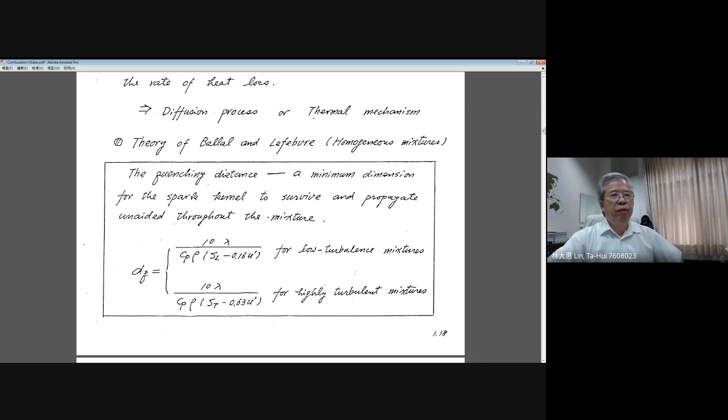Now I try to give you some experimental results to emphasize the dependence on thermal diffusibility and turbulent intensity on the quenching distance for low turbulent mixtures and highly turbulent mixtures. Those data came from the experimental results from Chin's experiments in 1982.

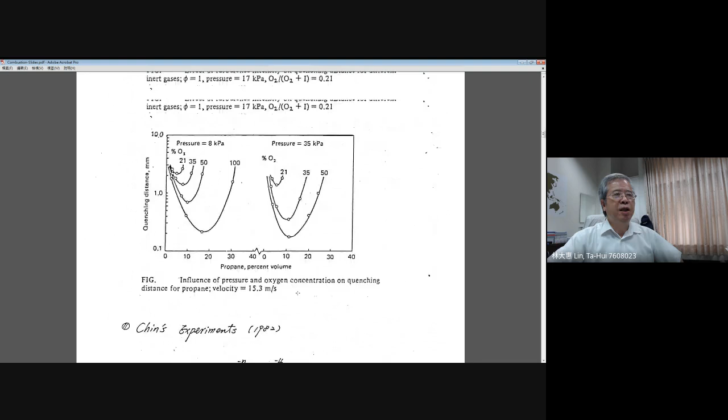The first figure tells you the quenching distance is a function of turbulent intensity shown on the horizontal axis, and it also changes with different mixing of inerts. Let me explain a little bit. For example, here they give you two sets of experiments, one for methane fuel, and the other for propane fuel on the right-hand side.

We look at this because we think about the usual way methane or propane mixes with air. Inside the air, nitrogen will be the inert. When you do the experiment with methane mixing with air, you can see the quenching distance increases with increasing turbulent intensity for both cases of methane and propane.

It is quite easy to understand following the previous formula. When you have a larger turbulent intensity, those turbulent eddies will carry a certain amount of thermal energy away from the control body you want to ignite. If you have a larger turbulent intensity, the quenching distance increases, meaning you need a larger fireball to have a successful ignition.

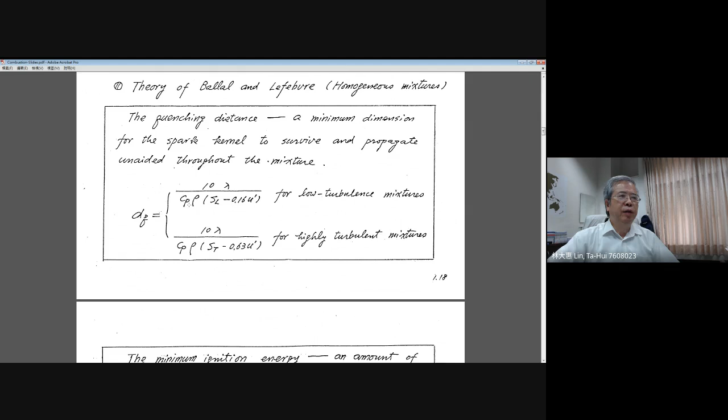Next, we change the inert from nitrogen to carbon dioxide. Nitrogen and carbon dioxide have almost the same thermal conductivity, but carbon dioxide has a smaller specific heat, while nitrogen has a larger specific heat. Going back to the formula, specific heat exists in the denominator. When you have a small value like carbon dioxide, the quenching distance will increase, become larger. So the line for carbon dioxide as inert is higher than the line for nitrogen, for both cases.

This is the first part I want to emphasize. From the comparison of carbon dioxide and nitrogen, they have the same thermal conductivity, but nitrogen has a larger specific heat, which makes the thermal diffusibility smaller. Then the quenching distance will be smaller compared with that for carbon dioxide as an inert.

Now, next we think about when we change the inert to helium and argon, they show different variation for thermal diffusibility. Let's compare these two cases, helium and argon. Both are simple atomic gases, and they have almost the same specific heat, but the thermal conductivity for helium, because it has a smaller molecular weight, is stronger, larger than the thermal conductivity of argon, which means they have a higher thermal diffusibility.

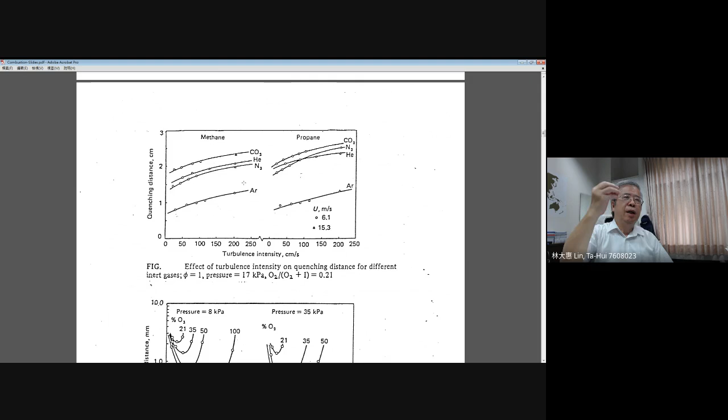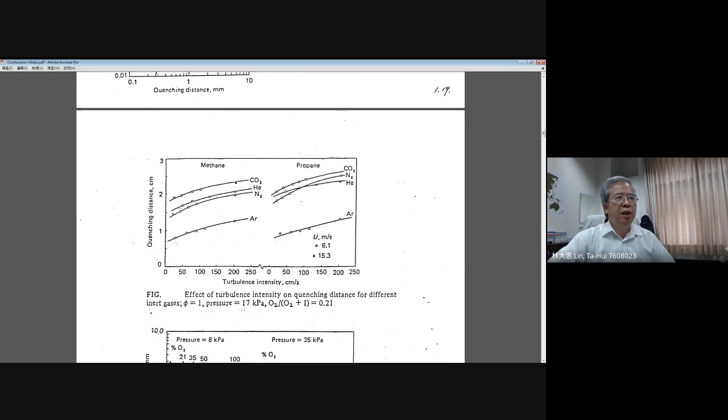Lambda, the thermal conductivity, occurs in the numerator in the previous formula, as you see in this curve, this formula. When you have a larger thermal conductivity, that means you will have a larger quenching distance, and you can see the quenching distance for helium this time is higher than that for argon, for both cases.

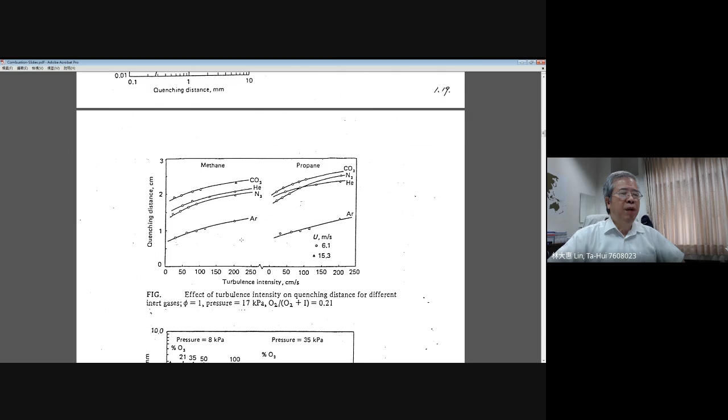This experiment result gives you the idea about the influence coming from the thermal diffusibility and also the turbulent intensity, as described by the formula for the minimal dimension of spark kernel, which we call the quenching distance. The next figures tell you some influence coming from the mixing ratio and also the pressure.

The left-hand side shows the low pressure, 8 kPa conditions. Every curve for a different concentration of oxygen shows a V-shaped curve. For example, let's look at the pure oxygen case. There is a higher value on both sides, a higher quenching distance for the left-hand side and right-hand side. You can figure out the mixing ratio change based on the horizontal axis.

They tell you the propane percent, which is the concentration percent of fuel. You can figure out for 100% oxygen, near the bottom of this shape, the mixture's condition is very close to stoichiometric. In this region, they correspond very nicely, well mixed, with enough fuel and enough oxygen, making it easier to be ignited.

Now the quenching distance reaches the minimum value, but if you increase or decrease the percent of propane, they will go through the so-called rich side or lean side. Rich side means you have extra fuel, and the lean side means you have extra oxygen. For both cases, they do not have the optimal mixing condition, so the minimal ignition energy or quenching distance will increase. This is easy to understand.

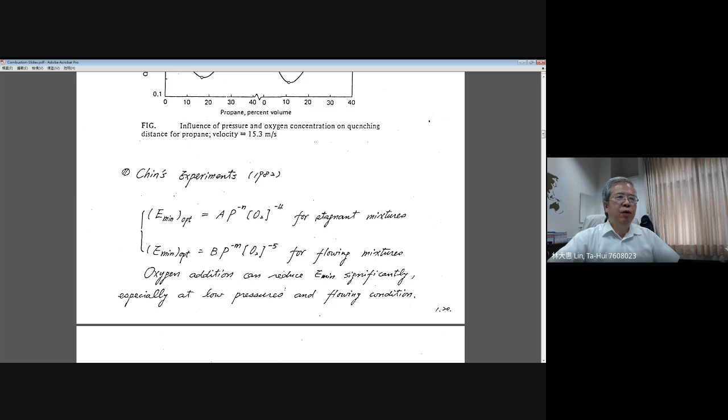In Chin's experiments, they further give some experimental measurements on the influence of pressure and oxygen concentration. They give the final results for the stagnant mixture and the flowing mixture. The minimum ignition energy is inversely proportional to the pressure, and also inversely proportional to oxygen concentration to the power of 4 for the stagnant mixture, or to the power of 5 for the flowing mixtures. These results can be justified from the data shown in the following figures.

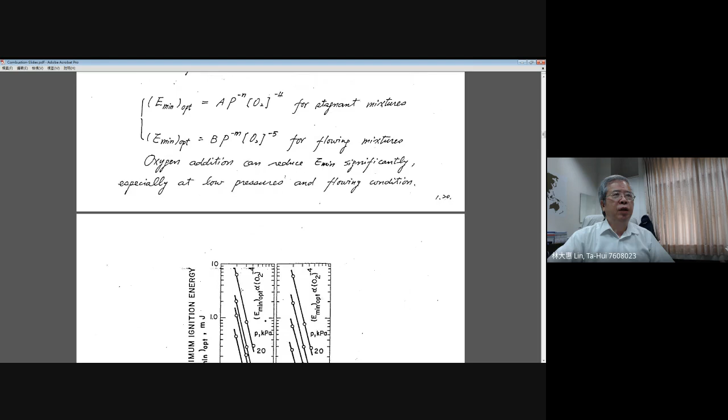This represents that when you take the slope of this linear line, you can get the correlation result with oxygen concentration as shown here. For the stagnant mixtures, the minimal ignition energy is inversely proportional to oxygen concentration to the power of 4.

Okay, this whole experiment data actually represents stagnant mixtures. The flow is stagnant, without moving or flowing. For both cases, they show the power to the 4th.

Inverse, the minimal ignition energy is inversely proportional to the power of 4 for both cases. Additionally, you can see the influence coming from the pressure. When you decrease the pressure, the minimal ignition energy will shift to the upper part, meaning you need more ignition energy to get the premixture ignited.

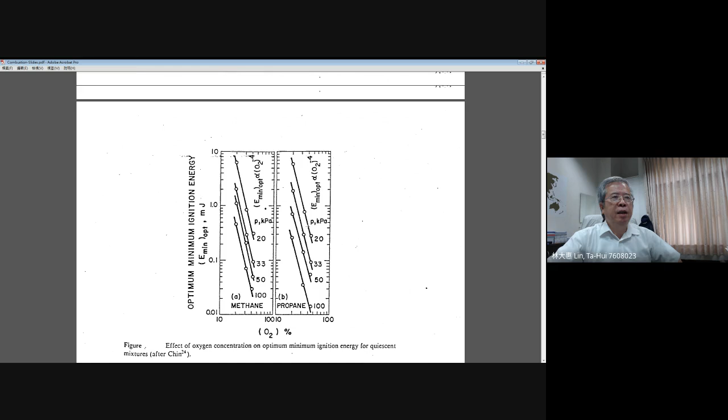This experiment data gives you the idea to think about the relationship described in the previous formula for the stagnant mixtures. For the flowing mixtures, they show the same results, but the slope for the linear lines is different. They tell you the minimal ignition energy for both cases, methane and propane, for the flowing mixtures.

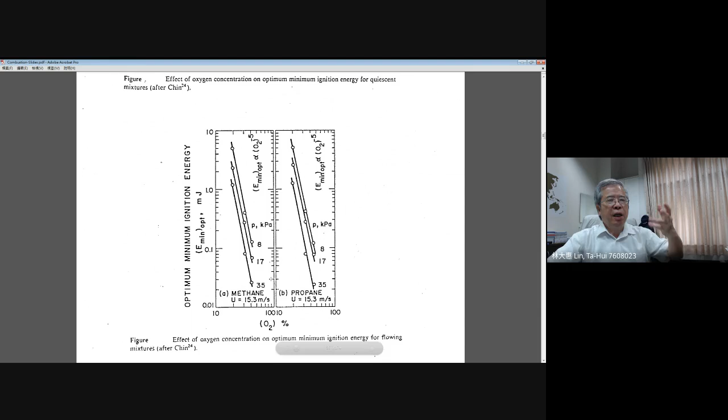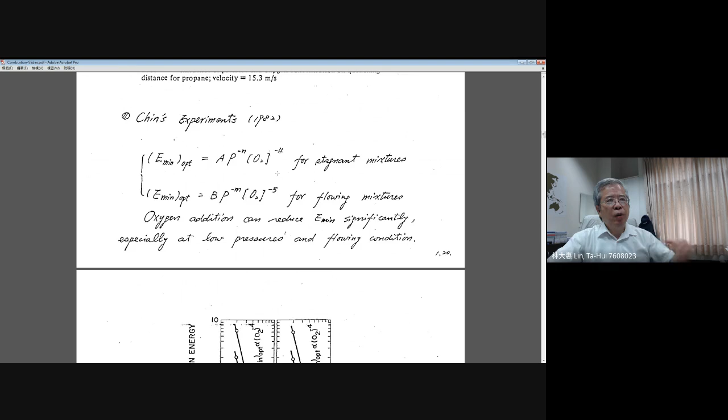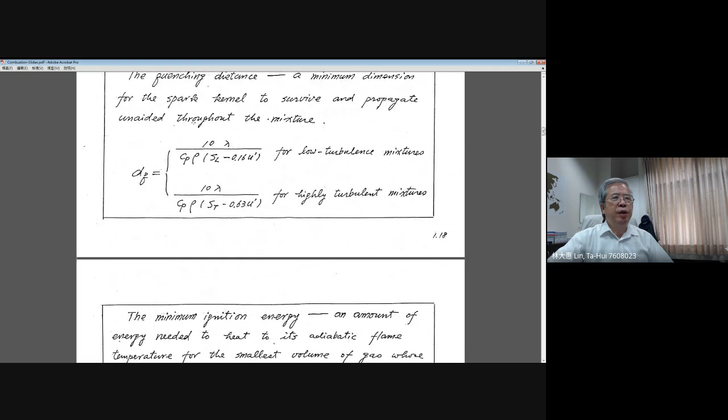Actually, the minimal ignition energy is inversely proportional to the order of 5 for this case. That means it is more strongly influenced by the oxygen concentration in the flowing mixtures. Those kinds of experiments are compared or confirmed and summarized as these two correlation equations. You can refer to them, and from these experiments in the literature, you can justify that the formula derived by the ignition theory is suitable for estimating the capability of ignition of a premixture.

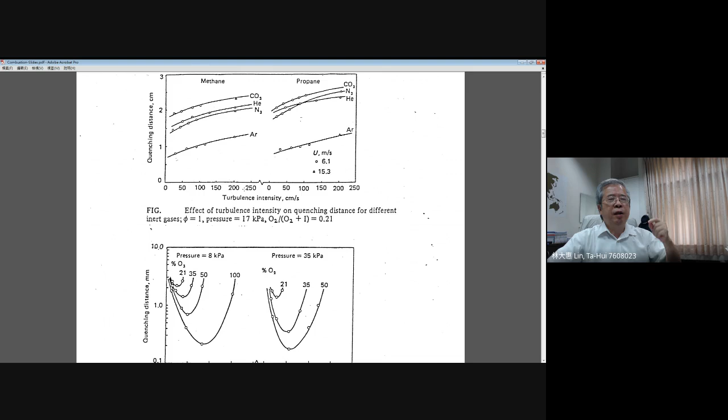Now the next step I emphasize, because from the so-called S-curve based on the Damkohler number, we understand there are two so-called transient states. One is ignition, the state of ignition as a function of time. The other one is the transient state we need to discuss, which is extinction.

Now we move to how to define the so-called extinction. Based on the definition of ignition, you need to supply enough energy of active species into your premixture, then you will start to have a chemical reaction continuously. This is basically the idea of ignition of your premixture.

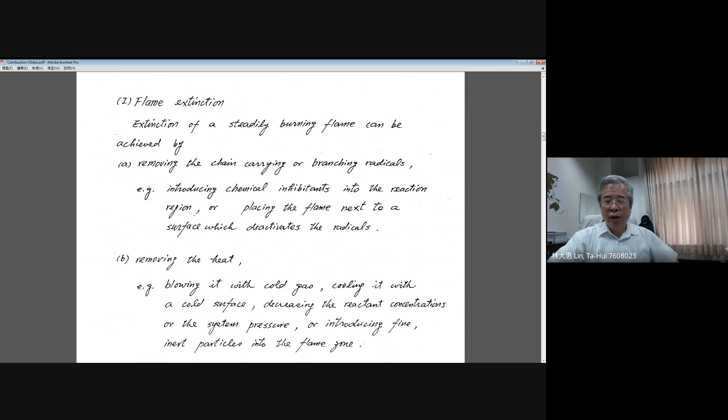And you can go back and think conversely. Think about flame extinction—you already have a premixed flame, and now you think about the factor to ignite the mixture, then think about how to quench it. Simply put, if you can carry a certain amount of thermal energy out, then the chemical reaction will be turned down. This is one way.

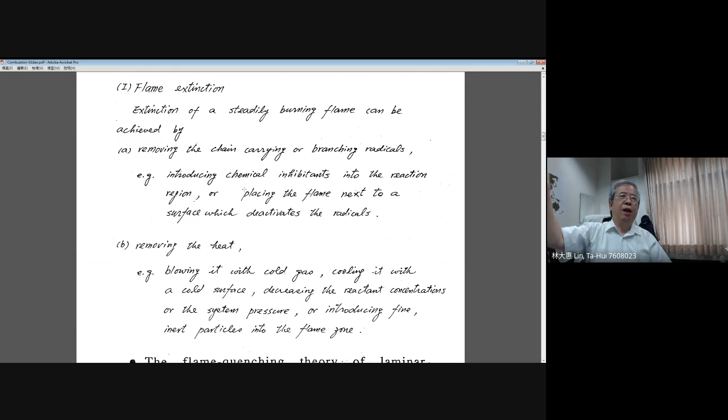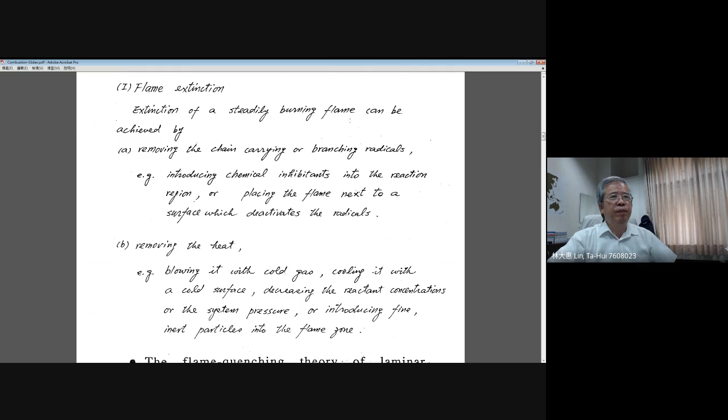Or you move away those kinds of active species, and the same thing will suppress the chemical reaction, giving you the idea about achieving extinction of a steady burning flame. There are two methods for you.

One is removing the chain carrier, the chain radicals. You remove those kinds of OH or O radicals, then you cut off all the chemical reaction steps and terminate the chemical reaction, and the flame will extinguish. A similar way, for example, is introducing chemical inhibitants to the reaction zone or placing the flame next to a surface which deactivates the radicals.

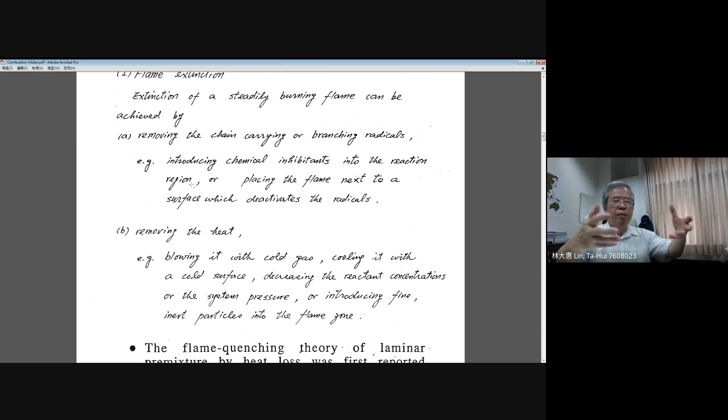Introducing chemical inhibitant to the reaction zone can simply be observed from fire extinguishment. When you have a fire and use carbon dioxide as an inhibitant, or use sand put on the fire, those kinds of sand or carbon dioxide will give you inhibitants. They will break up or carry out the chain carriers or branch chain radicals, terminating the chain reactions. Then the chemical reaction will cease, and the flame will extinguish.

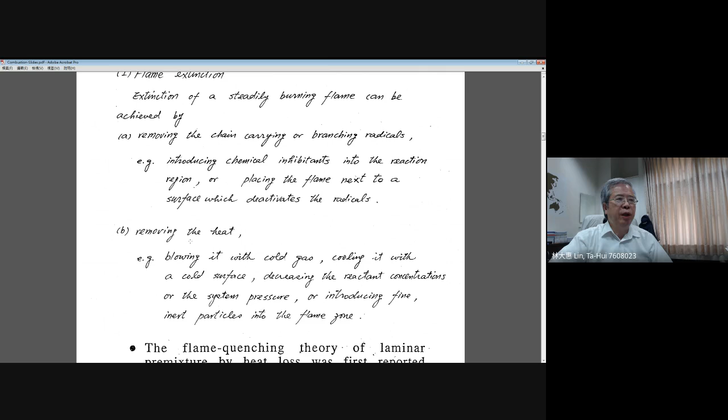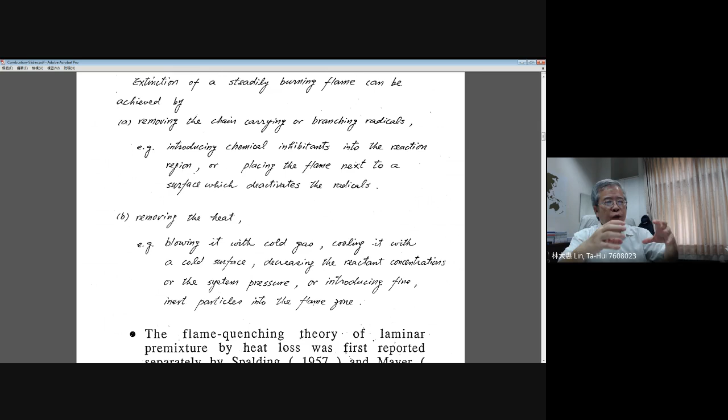The other method is removing heat. I think the easier way is blowing it with cold gas or a cold surface. You can even introduce fine inert particles into the flame zone. The simple way is using a water spray. Usually firefighters use water to quench all the heat contained in the combustible region, then the flame will extinguish. This is a typical example of extinction of a burning flame.

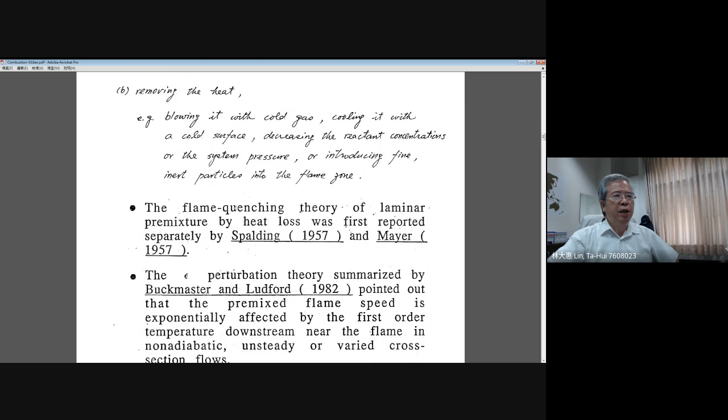And there is a theory we call the flame quenching theory, for the premixture by heat loss, reported by Spalding in 1957 and Mayer in 1957.

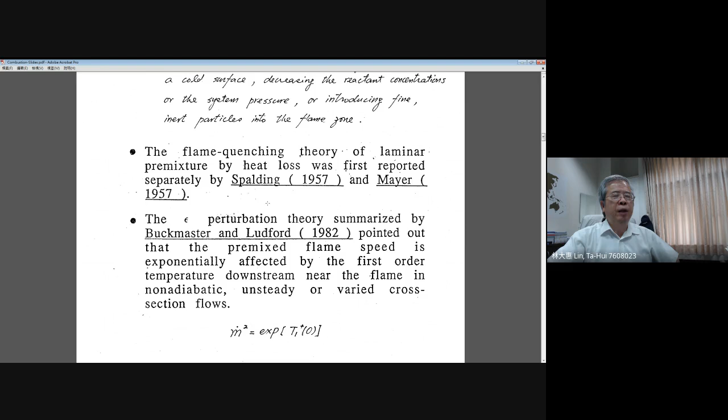Later, Buckmaster and Ludford used perturbation theory to analyze the flame quenching theory, and they got this very nice theoretical result. They tell you the burning, this mass flow rate, or you can see this as the flame speed, is a function. It's an exponential function of T1 plus 0. What is the meaning of T1 plus 0?

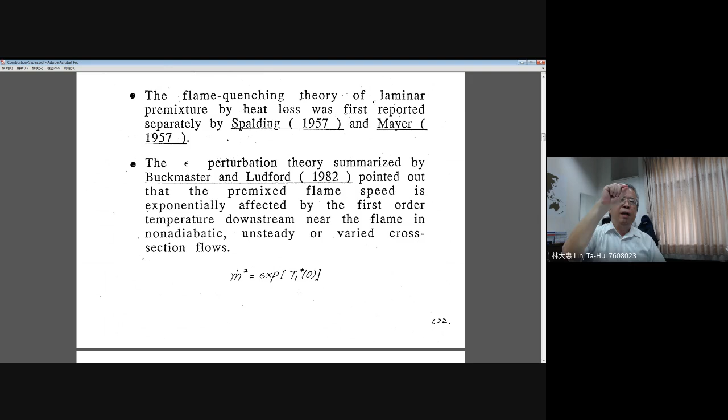Actually, this is a small temperature perturbation at the flame zone. For example, you have a flame temperature at the flame position, that is the maximum flame temperature in your flow. But now, when you apply some heat loss, the temperature will be decreased because the chemical reaction is weakened. Those kinds of variation can be found by T1 plus 0. Plus means the downstream of your premixed flame, very close to the flame surface. This small variation, large to a certain amount, then the flame will go to extinction.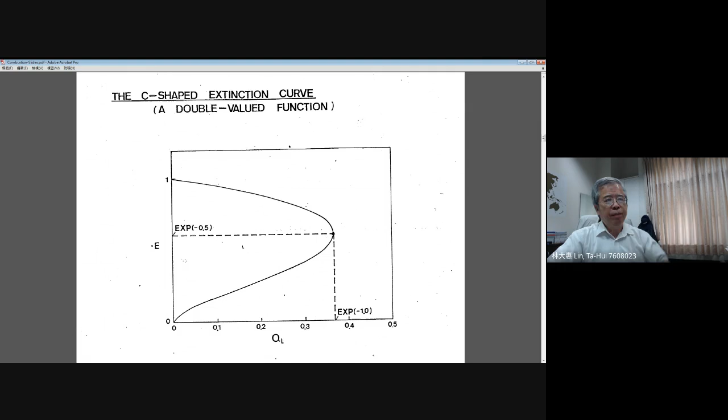And QL represents the heat loss. But this heat loss may come from conduction loss, radiation loss, convection loss - different kinds of heat loss get involved. You can have the total amount of heat loss as a quantity shown on the horizontal axis. They tell you for a given heat loss, you may have, for example, starting from 0. 0 means you do not have a heat loss. Here, this is an adiabatic case.

Now you have 1 because m dot is a non-dimensional quantity. M dot equal to 1 represents now you have a propagation velocity, this is equal to 1. You divide by the flame speed of the adiabatic case, then this is equal to 1. This is a stable burning point.

Now you try to increase your QL, that means you increase your heat loss. From the theory, the solution gives you this kind of V-shaped curve, okay, C-shaped curve, inverse C-shaped curve. From here, they tell you if you look at the upper branch, the flame speed starting from 1 equal to the adiabatic case - now, because of the influence coming from the heat loss, the flame speed will continuously decrease as you increase QL.

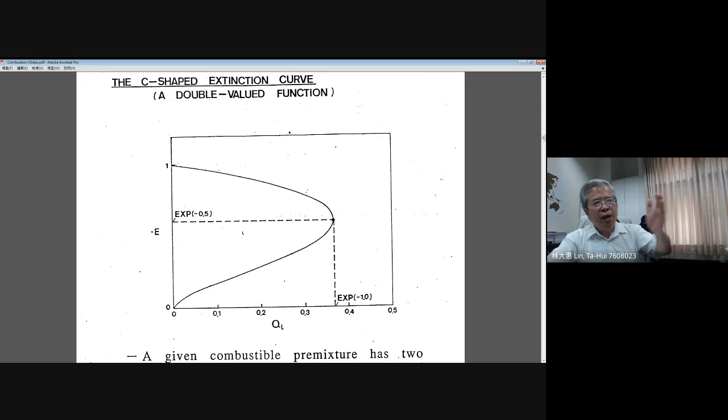When you look at this curve, I hope you remember there is a similar variation shown by the S curve, right? They just invert the S curve to show starting from steady burning on the left-hand side, with a continuous decrease to the right-hand side. When you go back to the S curve, let's move it a little bit to the previous slides.

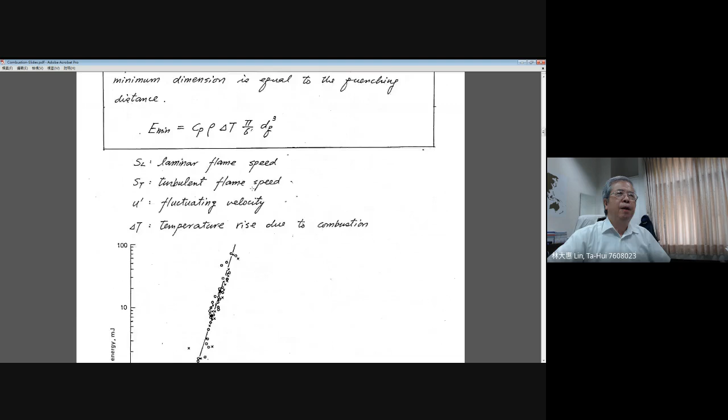In the earlier slides, I hope you have - let me, here is 1.16, right? Can you figure out the so-called C-shaped extinction curve, just the reverse of this intense burning branch? For example, here you can see this is equal to 1, right? If you do the normalization for the adiabatic value equal to 1, then they are continual, because the Damkohler number...

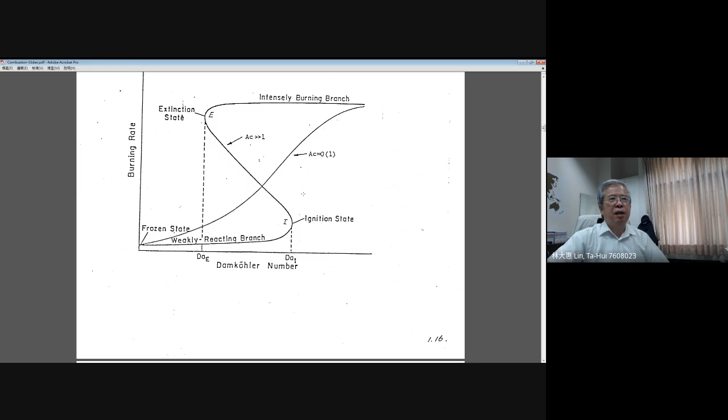Actually they give, if you try to change it as a heat loss starting from the right-hand side and you continue to increase the heat loss, then the burning rate initially may not have too much change, but later on it will change and decrease to a certain value up to here, then extinction appears. The C-shaped extinction curve is actually a reproduction of the upper branch of the Damkohler number plot - they show the same results, the same meaning of the so-called extinction behavior.

Now we go back to our C-shaped extinction curve.

Here in summary, from these figures, this is a very famous curve predicted by the extended theory that tells you a given combustible premixture has two possible flame speeds for a fixed amount of heat loss. From this plot, for example at 0.2 QL, they may have one solution in the lower branch, the other one in the upper branch.

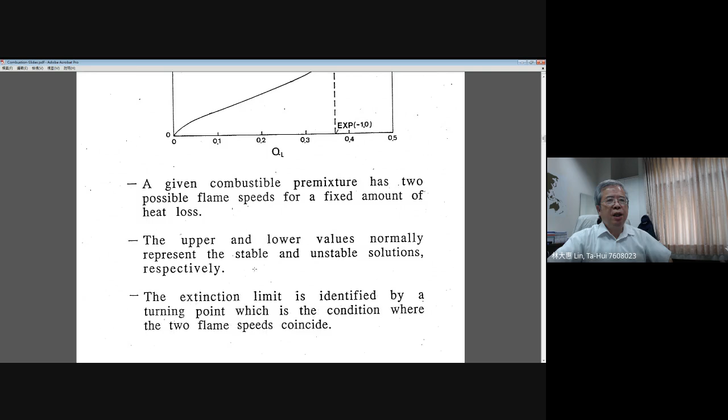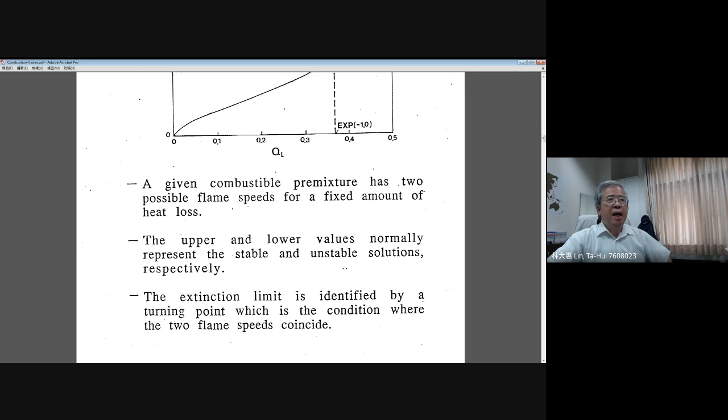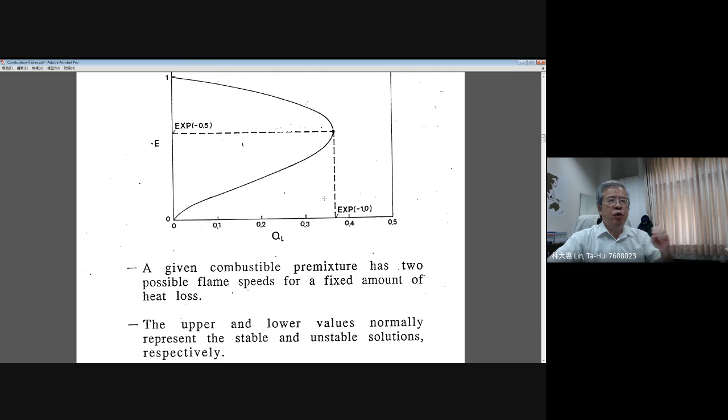The upper and lower value normally represent a stable and unstable solution respectively. You can have an experimental observation for the stable solution, but you may not have an unstable solution from experimental observation. Then the extinction limit is identified as the turning point. Turning point means that after the turning point, you may not have a solution theoretically exist. From practical experiment, you cannot have a flame exist in your premixture, meaning the flame is extinguished completely in your given flow.

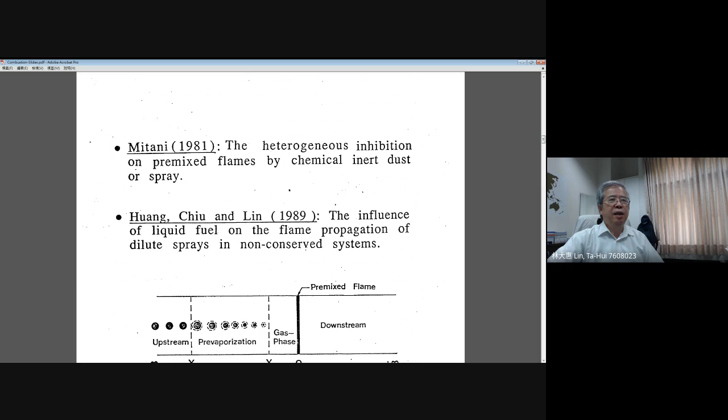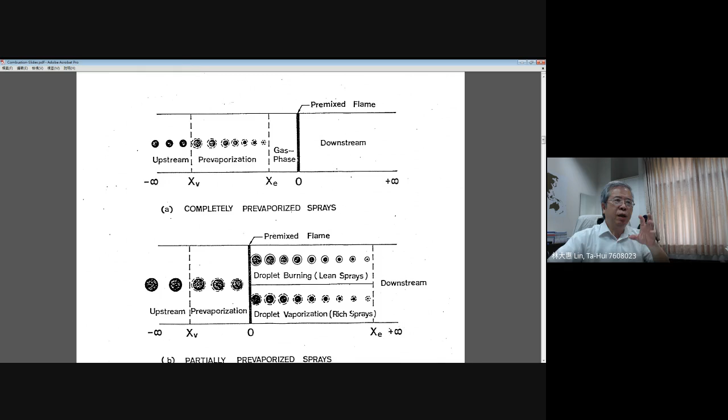I will not go through further, but there is some theory, including my theory published in 1989, where we try to introduce some kinds of inert, for example water, that can absorb heat into your flame zone for the one-dimensional flame. As I mentioned previously, if you try to make the flame extinguish, you can bring a certain amount of heat out. One way is to apply water mist, or use some inert particles into your combustion zone, and those inert or water will absorb heat and produce the extinction.

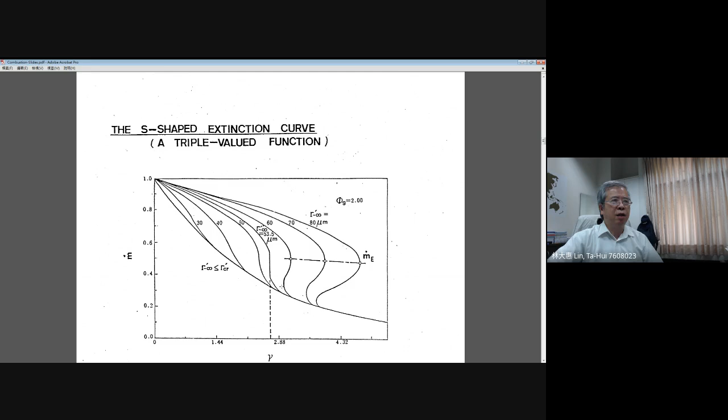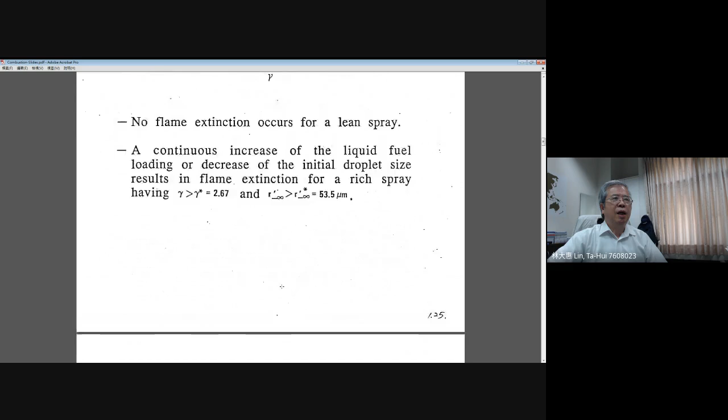Those results get involved with two-phase flow, and they still have a C-shaped curve, but with droplet participation, some kinds of S-curve occur, and a triple-valued function can be formed. I will not describe this in too much detail because we did not give you the idea about spray characteristics. Now I've finished the introduction on extinction.

I try to emphasize the mechanism for ignition and extinction. Basically, these two, ignition and extinction, are transient states. All variation of the burning characteristic for ignition or extinction is a function of time. For ignition, the time interval can actually be measured. But for extinction, up to now, people do not have a very definite conclusion for the time of extinction.

From our experiment, extinction always occurs suddenly in a very short time, so short you cannot even measure it. But for ignition, you can do the measurement when you supply electric energy from the spark, and you can count when the flame occurs by the microsecond or millisecond. That means they still have a so-called ignition delay time.

The ignition delay time means that when you supply thermal energy into your combustible mixture, it still needs a very short time to initiate the chemical reaction, the multi-step chemical reaction. Once those multi-step chemical reactions occur in that short time, ignition will continue to make the flame self-sustainable, then propagate. The ignition delay time is usually described for ignition experiments, but nobody uses a so-called extinction delay time.

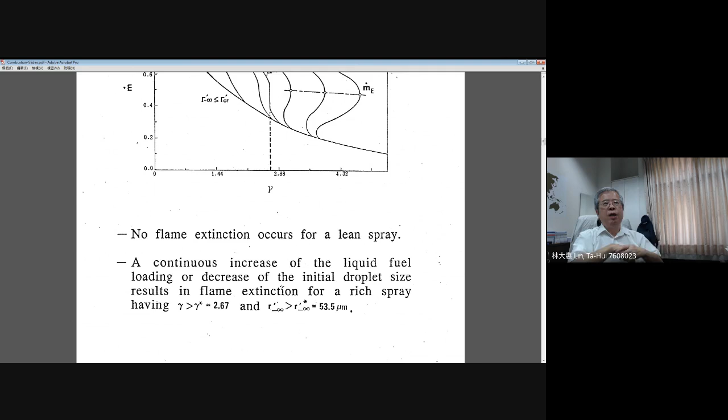But anyway, I still want to give you the idea based on the Damkohler number curve to think about increasing Damkohler number: you can make the premixture ignite. And as you reduce the Damkohler number, the propagating flame will be weakened continuously, then extinguish. Those kinds of abrupt changes, represented by the turning point on the S-curve or the C-shaped curve, represent ignition and extinction behavior.